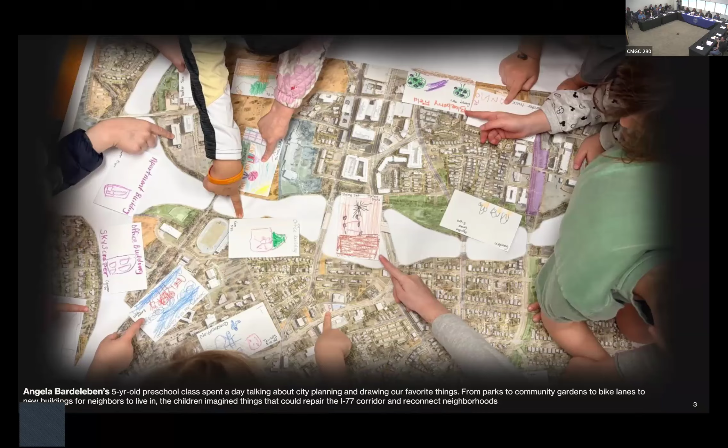First of all, thank you Commissioner Meyer for the invitation to share these exciting designs with you and the rest of the committee and non-committee members for being here to see, hear, and ask questions. I think today is a historic day in our community, not just because my daughter Edie turns 10 today, but because I feel we are embarking on a long overdue journey to repair and reconnect what those before us have broken and disconnected. I'm excited about that opportunity, and I hope by the end of this presentation you share our excitement.

Over the past several months, something remarkable has happened in Charlotte. A community-wide conversation about healing, reconnection, and the kind of city we want to become was the result of a conversation that began as just concerns about another highway widening project.

When we at Sustain Charlotte launched the Reimagining 77 challenge, we honestly didn't know what to expect. We didn't know if anybody would participate since we weren't paying anyone — we were just asking people to volunteer their time and talents. But the response was extraordinary. We received ideas from professional urban designers, architects, planners, engineers, students, and neighborhood advocates, even a submission from someone in Wisconsin who's never been to Charlotte, and children as young as 5 years old submitted their ideas.

Despite the differences in age, background, and technical expertise, there was a striking common theme running through nearly every submission: people are hungry for a future that reconnects communities rather than further divides them. Again and again, people imagined parks instead of pavement, public spaces instead of barriers, greenways, safe walking and biking connections, gathering spaces, and places where children and families can thrive — not because they oppose reducing congestion, but because they want transportation investments that improve quality of life and strengthen neighborhoods instead of weakening them.

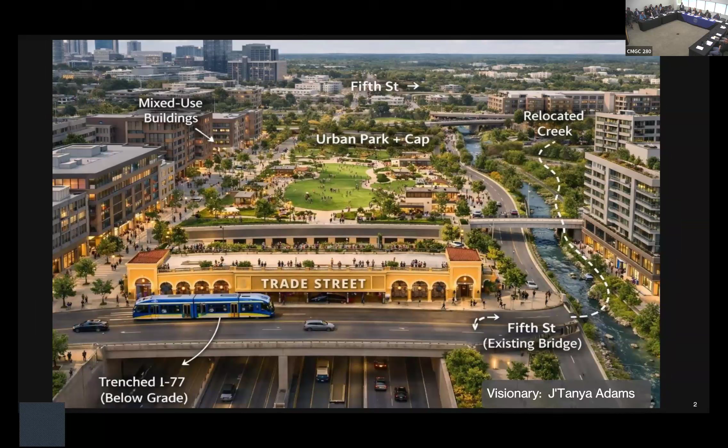I'm going to go through these quickly because of time, and I want to save time for the more in-depth ones. This first one popped up online — it was by longtime West Charlotte leader J'Tanya Adams. AI was used, but she's not a professional; she just typed in what she wanted to see, and it's pretty amazing.

There's a lot going on here — new mixed-use development along 77, with 77 running under the green space. Irwin Creek has been daylighted, as we say, opened up, which is currently mostly buried under 77. Lots of exciting things here. Next slide.

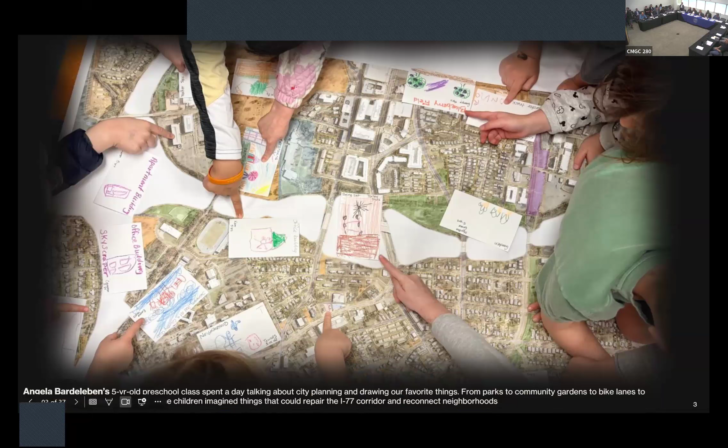This is a 5-year-old preschool class learning about urban planning and sharing what they'd like to see in place of 77. They drew their favorite things: parks, community gardens, bike lanes, and even blueberry fields. They had lots of great ideas — future urban planners, hopefully, in there.

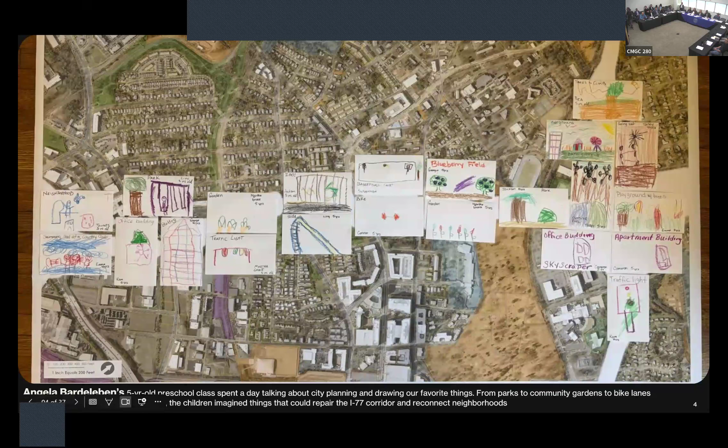Go ahead — another shot of their amazing artwork. I see a slide, even an office building, and there's the blueberry field, you probably can't see all of that, and a traffic light, of course. Go ahead.

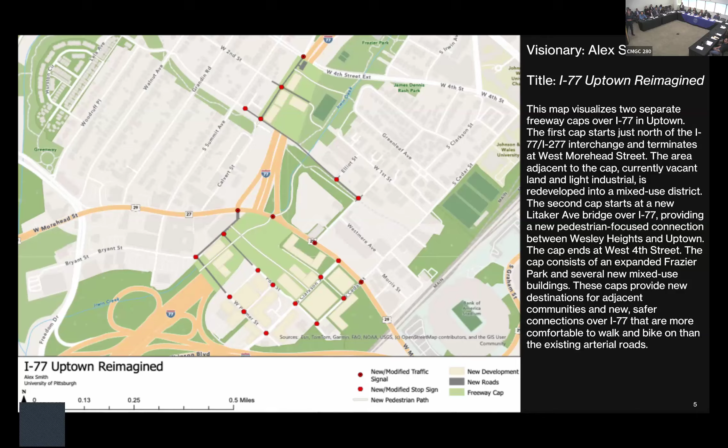Visionary here, his name is Phil Beasley. He called his design Reconnect the Urban Fabric. He envisions capping and burying 77 adjacent to Uptown, removing a segment of 277 to connect Uptown with South End, simplifying the network, reconnecting the grid, adding infill and park space.

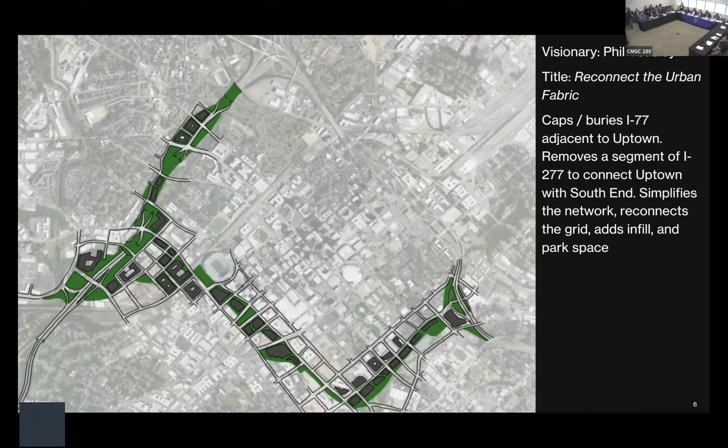Melissa Harmon, who I believe is a student at UNC Charlotte—we had several UNC Charlotte students submit—also proposed two freeway caps, and you should know none of them were talking to each other. But we saw a lot of similarities; almost everyone suggested a cap. Her vision was two caps over the corridor, an effort to increase walkability, connect residents to nature, uphold equitable solutions for the environment and neighborhoods, and so on. Both of hers would reconnect Wilmore to Revolution Park and Westover Hills on the west side of 77.

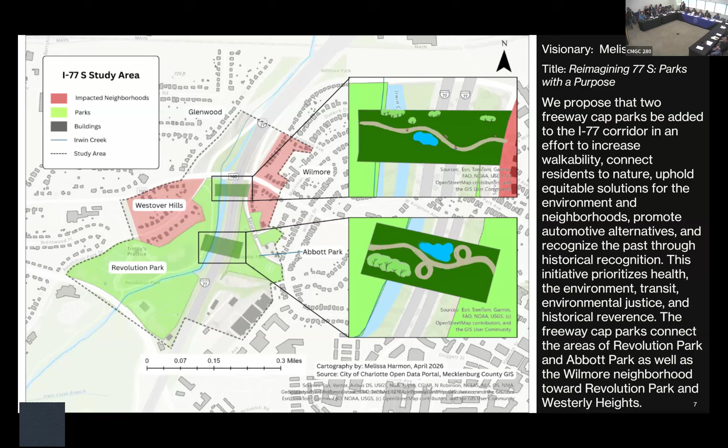And we'll share all these slides, so if you want to dig in more, you can.

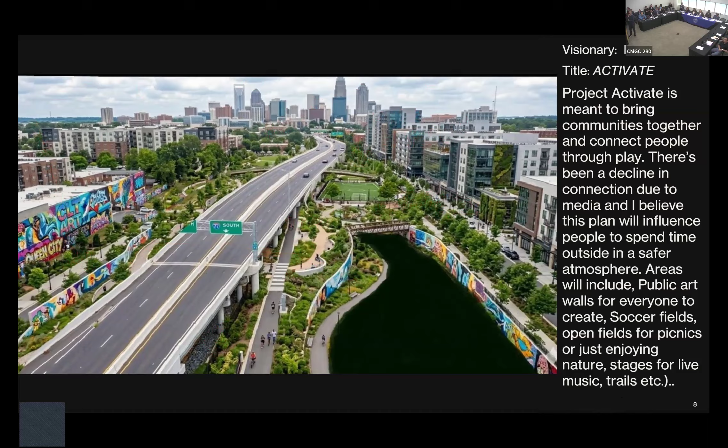Again, most of these are non-professionals. In fact, everything we've seen so far is by a non-professional. Here's another one—another student, I think at UNC Charlotte, Leilani Jones. Her project was meant to bring communities together and connect people through play. There's been a decline in connection, and I believe this plan will influence people to spend time outside in a safer atmosphere—areas with public art, walls for everyone to create, soccer fields, open fields for picnics, just enjoying nature, etc.

This is a sketch—there's a series of sketches—from a non-professional named Oliver Buccino. This is the guy who lives in Wisconsin and has never been to North Carolina. He designed what he called Queen City Plaza. Probably because he doesn't live here, he looked at reconnecting South End to Uptown by capping 277. He said this plan seeks to create what is desperately needed in the area: a new destination in the form of a pedestrian plaza with a variety of colorful architecture, all oriented towards the new space. This reconnects downtown and South End, which is currently afflicted by the dead zone of the highway, unusable green space, and off-ramps. Removing the existing freeway or capping it to form a park is not good enough—there has to be an actual plan to build a district with vitality.

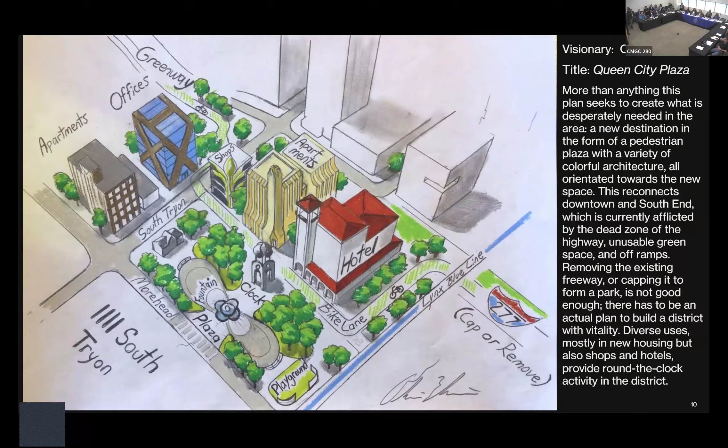Diverse uses, mostly new housing, but also shops and hotels, provide round-the-clock activity in the district. He's one of the few that actually hand-drew his sketches. He's got another one here.

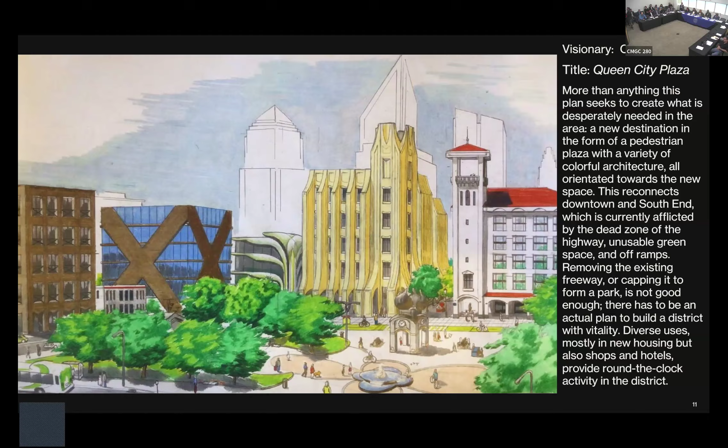Pretty cool examples of architecture. Just imagine if that is where 277 is today, between Uptown—you can see Uptown in the background. Another view, so pretty cool. Got a cat bus in there.

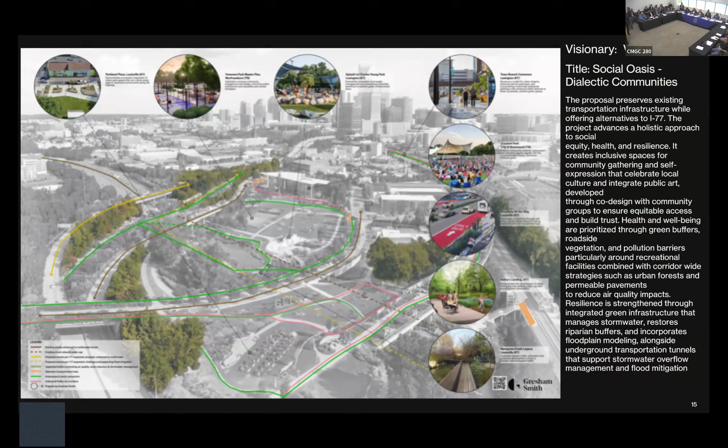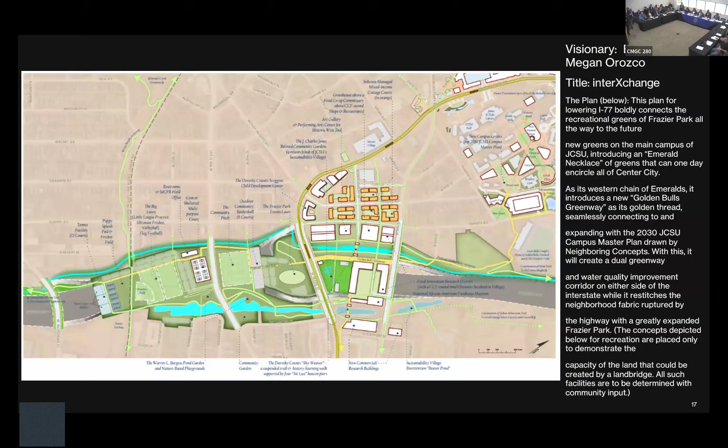Next, you can skip this one. We're going to come back to this one. You can skip a few slides, go ahead. I meant to delete these. This version didn't get deleted, keep going. We're gonna come back to these, I promise. Keep going, keep going. I think this is the last one.

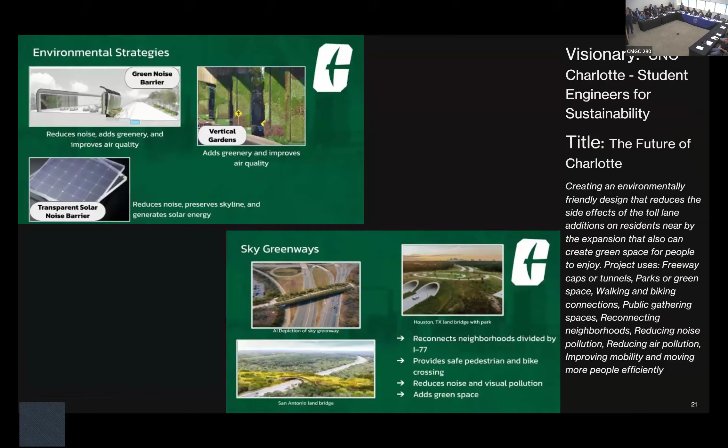Okay, here we had the UNC Charlotte Student Engineers for Sustainability. I didn't even know that group existed until this challenge. I don't know if you do or did. So they took an engineering approach, but they came up with lots of different ideas. They had the caps that everyone else seemed to want to do as well, but also noise control strategies using green noise barriers, rubberized asphalt, earthen berms. They also envisioned what they called sky greenways, reconnecting neighborhoods divided by I-77, reducing noise and visual pollution, adding green space, vertical gardens on some of the existing sound walls, and transparent solar noise barriers. Lots of interesting creative ideas from our local engineering students focused on sustainability at UNC Charlotte.

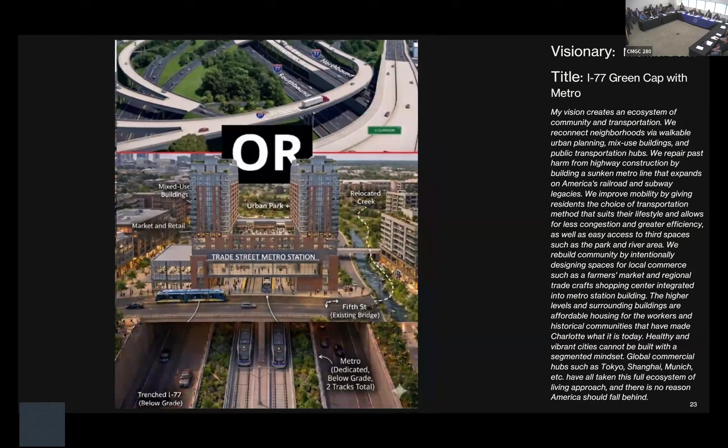In the name of time, I'm going to skip over this one. It's pretty similar to what we saw before with Jatania's, but I will say what they had there was commuter rail. Maybe go back for just a second. So in here, you see 77 is under the cap, but also down the center, they have commuter rail, and they envisioned 77 becoming a commuter rail corridor, not just a corridor for moving people in cars and trucks.

Okay, next one. So did this individual, they also envisioned light rail in the 77 corridor. Keep it moving here.

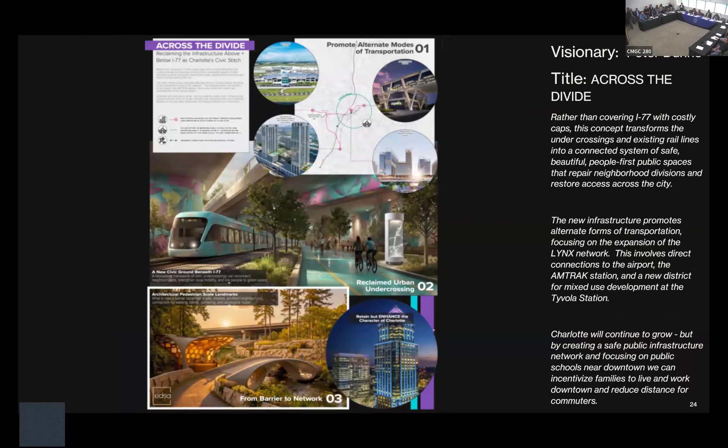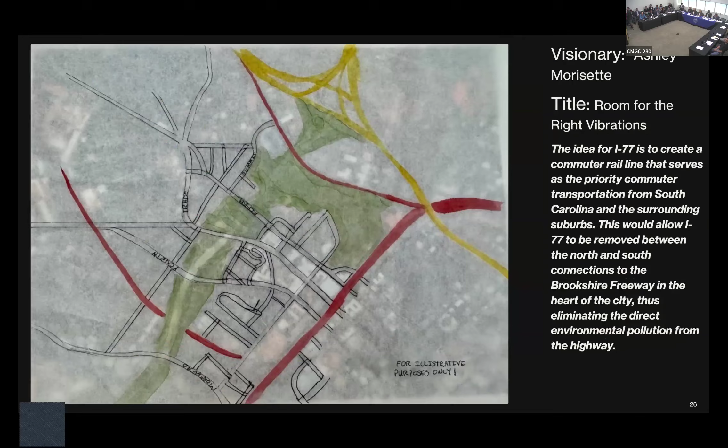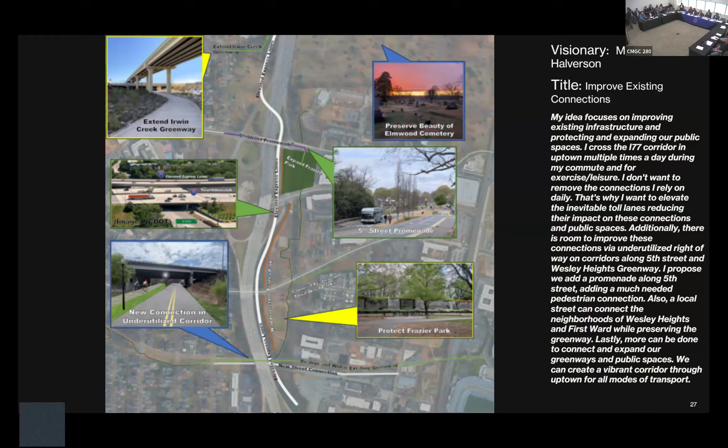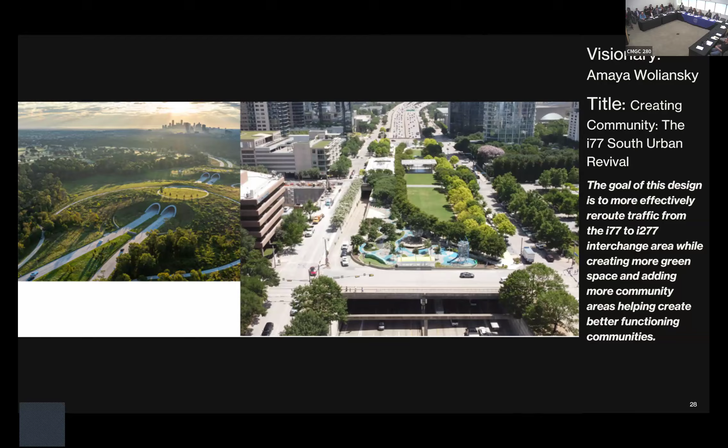I'm going to skip ahead a little bit so that the rest of the presenters have time. Just give you a quick glance at these.

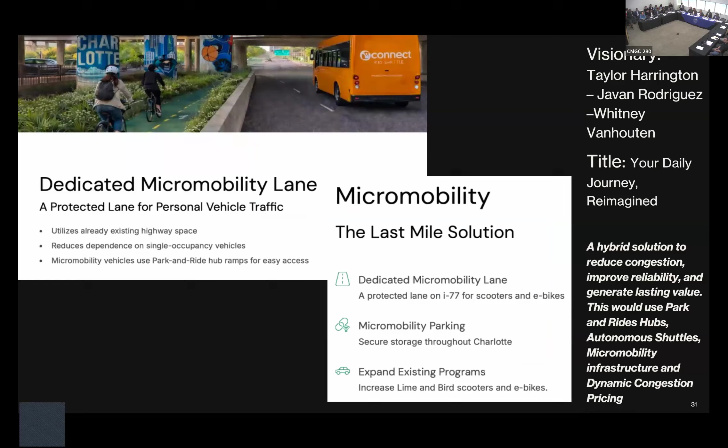Very quickly, this team came up with lots of new ideas. They talked about having autonomous shuttles, like you see there in the image, that's a UNC Charlotte autonomous campus shuttle. They talked about having those in the 77 corridor. A dedicated micromobility lane, so a lane on 77 separated, of course, with hopefully a very sturdy cement barrier for micromobility, that's bikes and scooters.

They talked about dynamic congestion pricing—charging people who drive into the city a higher fee at certain times of day to reduce congestion. This is being used in some other cities, including New York, and they've calculated how much money this would generate. Some of that could come to the county too, so this could be a money generator for the city while also reducing congestion.

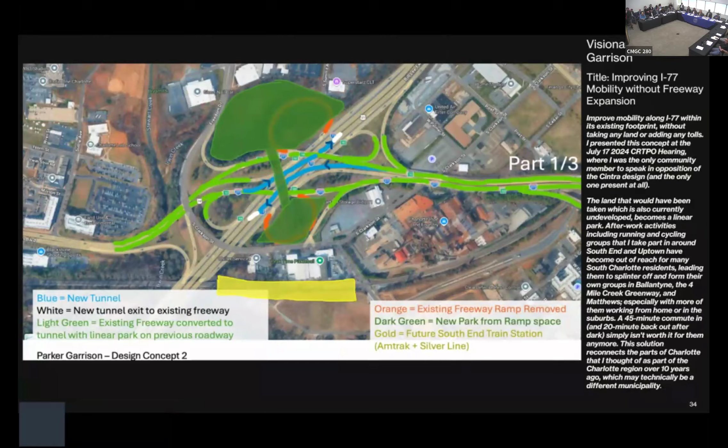We'll keep going. This is a 3-part design by Parker Garrison. Again, I was just amazed. I think Parker Garrison is a computer scientist, but does urban planning on the side.

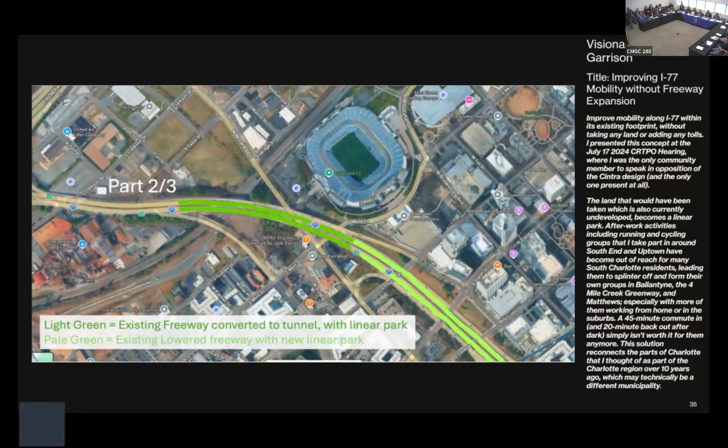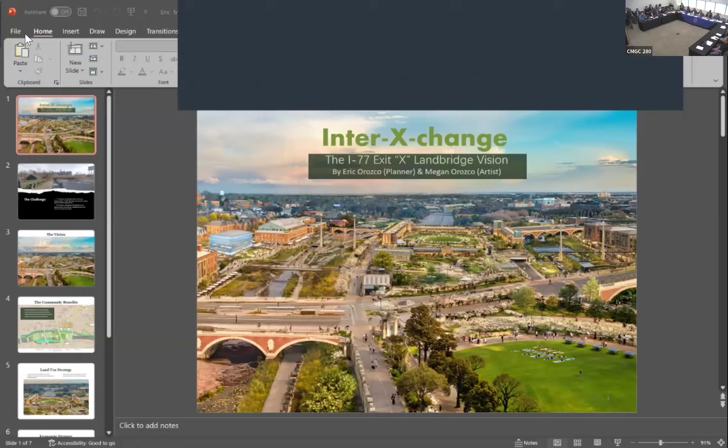This might be our last one for now. Let's jump to the next slide deck. I'm going to present next the vision of a local designer here in Charlotte named Eric Orozco. Eric and his wife Megan Orozco teamed up on this. He couldn't be here today, so he put together these slides and asked me to present them for him. The name of his design is Interchange—Inter-X-change—and he's looking at the intersection of 77 and the Belk.

So that's a big picture view of it. You can't really see from this angle, but 77 is under that green space—you can see it at the top of the image going under. This is a series of caps between Trade Street and 5th Street. And of course you can see the creek—he's actually relocated Irwin Creek in his design, which would happen with the 77 toll lanes. He has a lot of really interesting ideas about why that's important from a floodplain and ecosystem restoration standpoint.

So he talked about the design challenge—designers always talk about the challenge they're trying to address. The challenge here is that I-77 divides the historic West End and other West Charlotte neighborhoods from uptown like a wall, limiting connectivity, safety, and economic opportunity. This project reimagines this barrier as an opportunity to reconnect neighborhoods and restore community fabric.

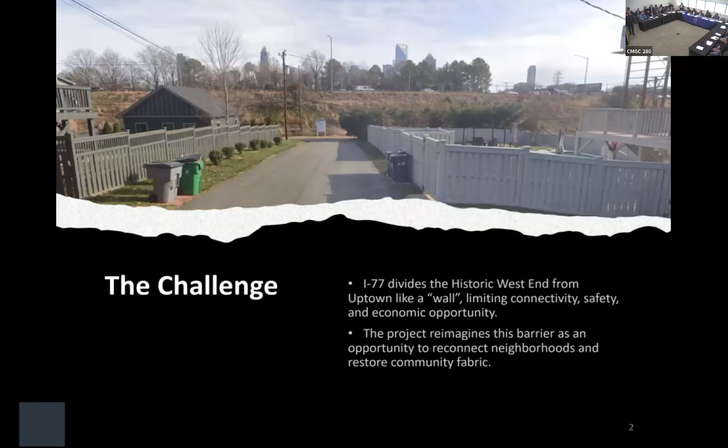Again, I won't read them all off, but he's named different buildings like the J. Charles Jones Beloved Community Garden, a research hub of JCSU Sustainability Village. He's someone who deeply understands the history of West End and the neighborhoods adjacent to 77, and his vision is to bring those stories and those people alive and honor them through the development that would be made possible if we capped 77 here.

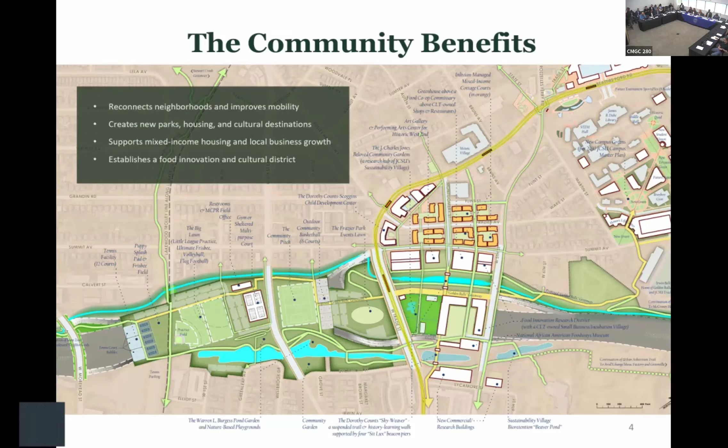And then center the uses and programs inspired directly by the lives of local luminaries, as I mentioned a moment ago—a National African American Foodways Museum, an urban farmers market pavilion, an urban agricultural teaching garden. Lots of opportunities.

I think the big takeaway here is we have an enormous amount of land on the edge of Uptown that is not being used currently. And I'm not talking about the land that 77 sits on, I'm talking about the amount of land that is completely wasted because of entrance and exit ramps, more than we need in that area. And they encircle, you know what the ramps look like, they're huge circles, and all the land in the middle is completely unused.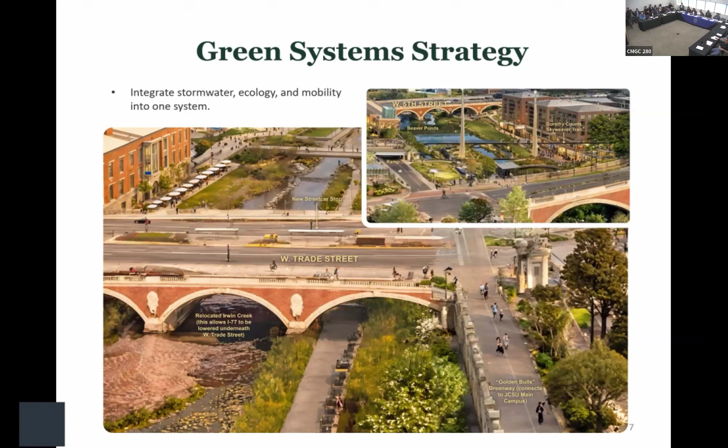Go ahead. And that's it.

Now, I'm excited to turn it over to the team at Gresham Smith, one of our best local design, architecture, and engineering firms. And I'm honored to pass the mic to Vama Joshi, who is an architect and was the lead designer for Gresham Smith's submission, and also a very generous and dedicated Sustain Charlotte board member.

Thank you. And I just want to make sure you know that it's 2:07, and we have a hard stop at 2:30. Yes, so absolutely keep going. Is it on? This is on, right?

Okay, perfect. Thank you everyone for your time in reviewing our vision for I-77 expansion.

Okay, perfect. I can start and then you can move to the next one. I think first slide kind of shows where we are today at the interchange.

Yes, perfect. So we know Charlotte is growing fast, right? And with growth comes opportunities, but also challenges. The interchange that you see there at the Wilkinson Boulevard and John Belk Freeway is the perfect example of how transportation infrastructure shapes the cities we live in. While it is designed to efficiently move traffic, it also determines if it divides or connects the neighborhoods. Today, we are exploring how we might rethink this interchange to better serve all Charlotte residents, not just the drivers passing by.

Okay, so if you go to slide 5, and then once you're there—so this is our proposal. Our vision basically reimagines the I-77 corridor as a multifunctional civic and ecological asset, preserving existing transportation infrastructure while introducing alternatives to NCDOT's proposed expansion. We are utilizing the transportation infrastructure as a connector rather than a divider, relinking neighborhoods, improving environmental performance, and creating public spaces.

You may have to just pause there. If you can go back to slide 5, that would be great. Slide 6, please.

Yes, so here we are highlighting some of the upcoming projects around that interchange. Considering all those high density mixed use projects, the need for public open space at this intersection we think is essential. Next slide, please.

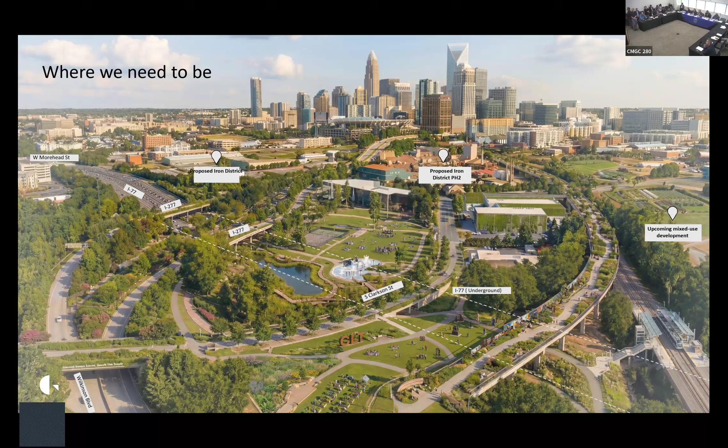So our vision focuses on repairing and reconnecting Charlotte. As shown here, the I-77 interchange is about 35 acres of land, approximately 2.5 Bank of America stadiums. It is a significant amount of land at a prime location, which currently is only functioning as transportation infrastructure. It could very well be a community asset.

At the same time, Charlotte's park score is 37.5 out of 100, and 39% of residents live within a 10 minute walk from a park. Spaces like this interchange present perfect opportunities to improve access to green spaces for the nearby neighborhoods. There's numerous research that shows how access to urban green spaces improves physical and mental health. There's also a strong economic argument that shows investing in public spaces boosts local economies.

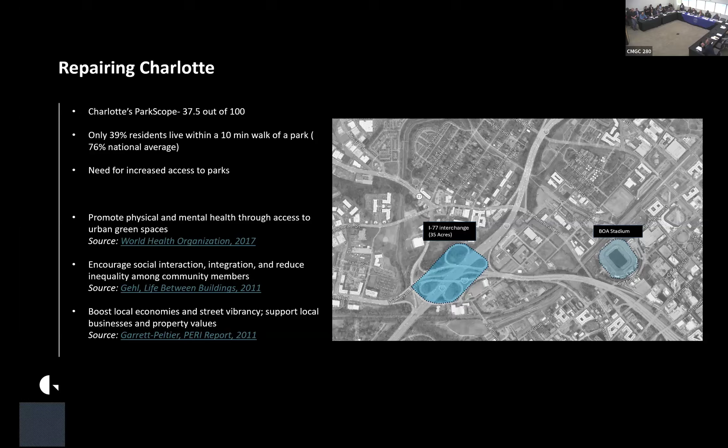So we took inspiration from projects like Clyde Warren Park in Dallas, the Big Dig in Boston, and Freeway Park in Seattle, and felt comfortable proposing a vision that includes a combination of taking a portion of I-77 underground and capping a portion of it. We also took inspiration from local public art, natural landmarks, and existing infrastructure to make this vision relevant to Charlotte.

So here are some key design features we would like to highlight. We are prioritizing equity, health, and well-being by ensuring access to public spaces, parks, clean air, and transportation choices for all surrounding neighborhoods. We are achieving environmental resiliency through integrating stormwater and flood mitigation into underground transportation infrastructure.

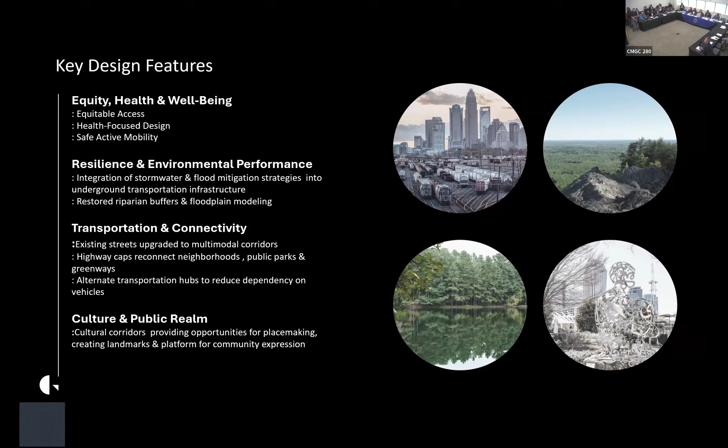We are improving transportation and connectivity by upgrading existing streets to multimodal corridors, combining adding caps and placing a portion of I-77 underground to reconnect neighborhoods, and introducing alternate transportation hubs to reduce dependency on cars. We are prioritizing culture and public realm by creating spaces that support placemaking and provide opportunities for communities to express themselves and gather. And now Fernando here will walk us through how we are implementing these key features at the interchange.

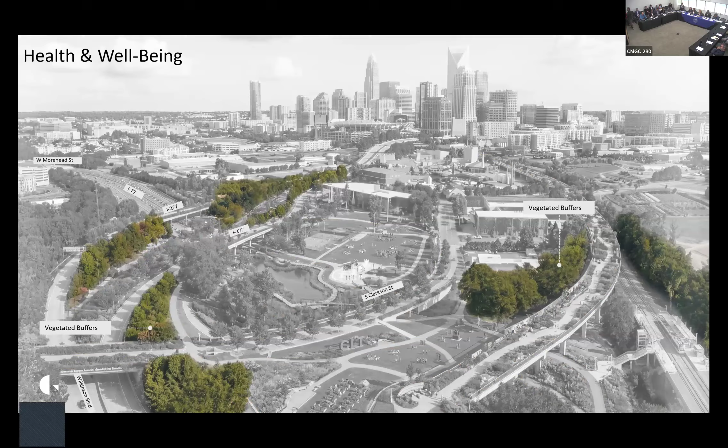Thank you, Vama. To everybody, I'm Fernando Claudio, an innovation technologist here at Gresham Smith. I wanted to take you all through our vision and our proposal and how some of these key features are being highlighted, starting off with health and well-being, where we're getting vegetated buffers that help us mitigate noise and air pollution while increasing biodiversity and helping us regulate temperature as well as stormwater management.

I'll go quickly through some of these, not just environmental but social resiliency, as Vama mentioned, by connecting existing parks and greenways through a series of bike and pedestrian trails, as well as adding underground transportation infrastructure for flood mitigation.

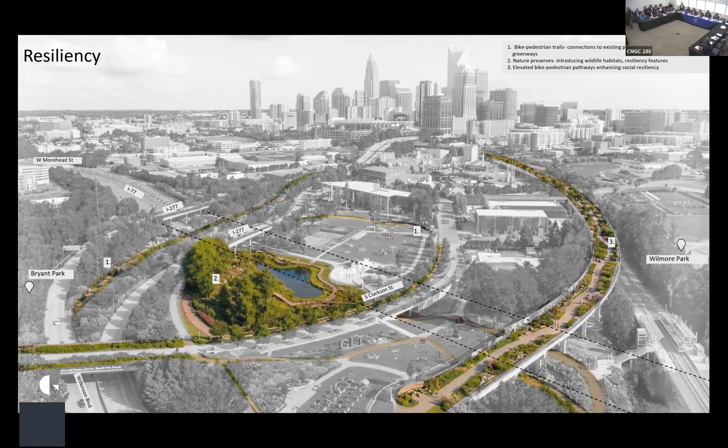One of the many things we talked about was transportation and connectivity, how we're upgrading existing streets to add additional multimodal systems for bike and pedestrian walkways, an elevated pathway that would connect all the way to uptown, which the community nicknamed the Charlotte Skyline, and a light rail connection with the upcoming proposal of the Silver Line, as well as shared mobility corrals for e-bikes and scooters, giving people different ways of getting to these spaces.

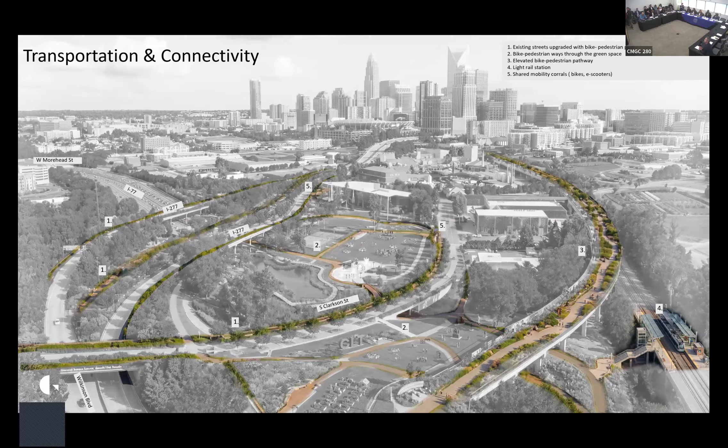Not just providing a green space for the sake of providing a green space, but the creation of cultural corridors where we're providing opportunities for placemaking, creating landmarks and platforms for community expression and gatherings as well.

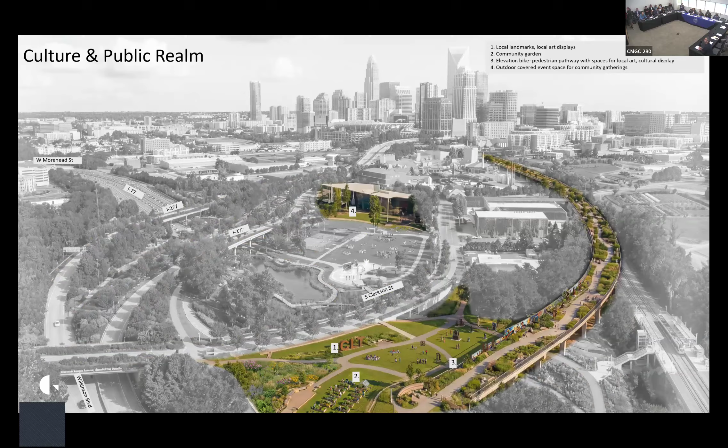As well as thinking about different amenities where people can gather and have different sets of outdoor activities, such as sports like tennis, basketball, volleyball, as well as things for children, like different playgrounds and splash pad areas. So we're thinking about this as a place for all ages to come together as a city.

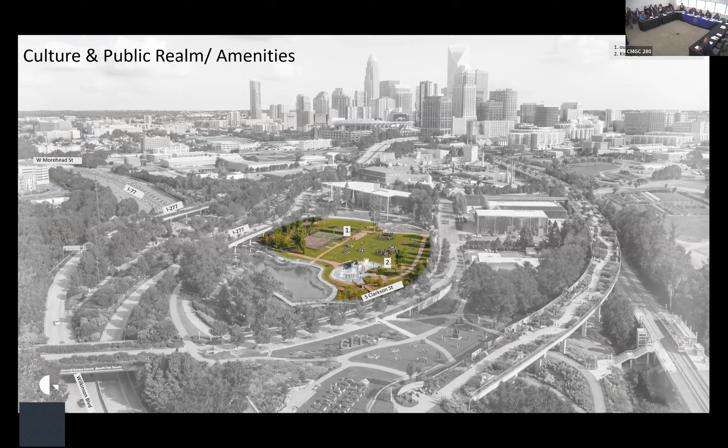Something I want to encourage before we move to the next presentation is that this shared vision we're seeing today is a way Charlotte can start to balance its mobility, equity, and quality of life. We're encouraging collaboration between public agencies, private investors, and community groups, because a project of this scale requires collaboration. All these groups need to come together to provide for Charlotte in a way that's focused on people as much as we prioritize cars.

To wrap up, I want to make sure that Charlotte, at this moment with these types of projects, has the opportunity not only to manage the growth of the city, but at the same time to shape a more connected, inclusive, and vibrant city for generations to come. Thank you.

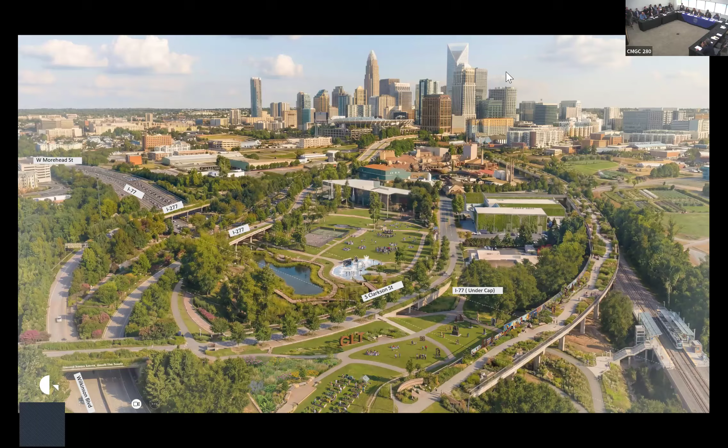Of course. How many more do we have? Just one more. Okay, no, you're fine. I know they want to ask questions and I just want to have time.

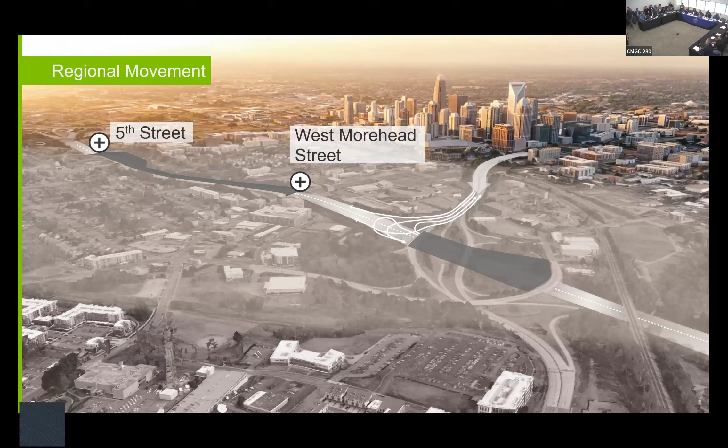So what we look at first is what are the big moves here. The first big move is: what if we took the existing elevated portion of I-77 between 5th Street and West Morehead Street—today it's elevated over existing local streets—what if we lowered that so it goes underneath the streets instead? We also look at the potential for rethinking the space needed for the I-77/277 movements, and if there's a way to compact that into the smallest space feasible. So the idea is to lower I-77 so it crosses beneath instead of above local streets, and compact the I-77/I-277 movements.

Next slide. Within the space that's left over, we would look at trying to do a restoration of Irwin Creek, daylighting it, making it become both an ecological improvement and a social improvement to the area.

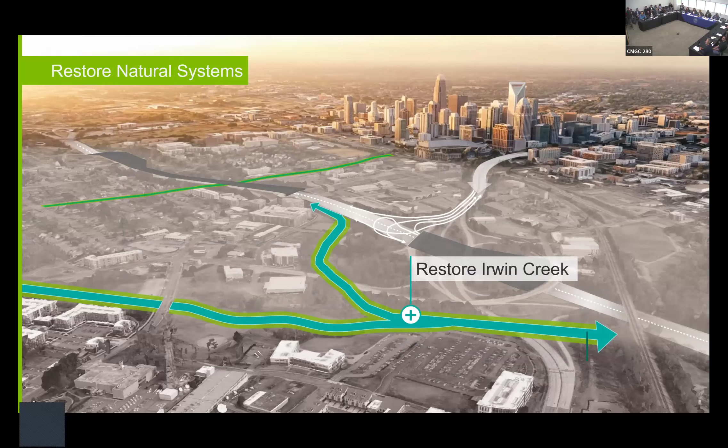Next slide. And within the space that's the Belk interchange today, the question is: is there a better use for that land, or what is the most valuable use of that land? Could it also function, potentially not as the on and off ramps to I-77, but as a densified network of local streets that restitches the urban fabric?

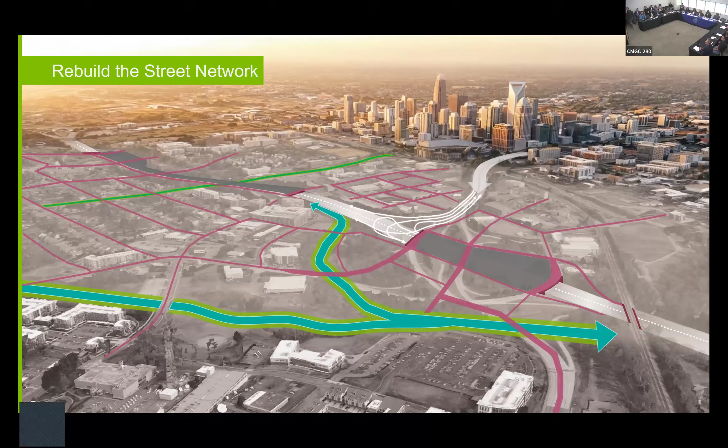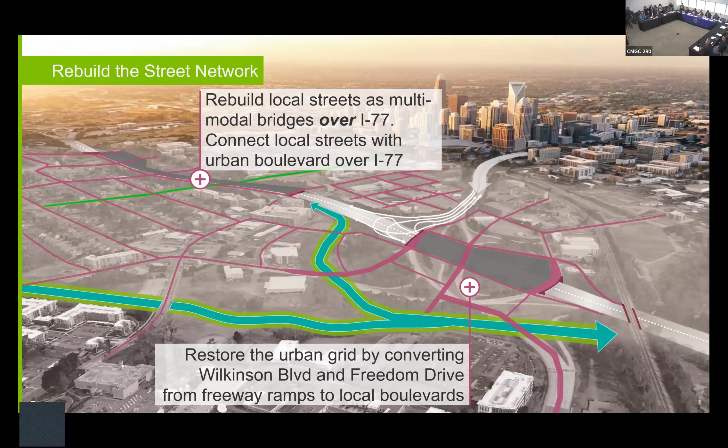Next slide. So the idea here would be to restore the urban grid by converting Wilkinson Boulevard and Freedom Drive from freeway ramps to local boulevards, while still preserving access to I-77 through a frontage road or something else I haven't figured out yet. Then rebuild local streets as multimodal bridges over I-77, connecting those local streets with an urban boulevard over I-77—so instead of being underneath I-77, those local streets would be above it. Next slide.

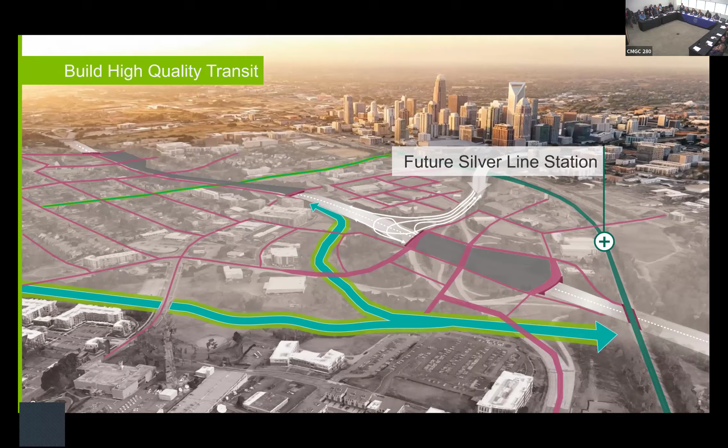So we also are trying to think about transit integration. We know the Silver Line's coming in the future, so the question is how do we maximize the transit-oriented community and transit-oriented development that's possible around our future Silver Line stations?

So we look at some of the areas where we were able to create this urban grid. How can we use that to become new development space? That's space for housing, office, retail, civic uses, and parks. It can be used for many different purposes.

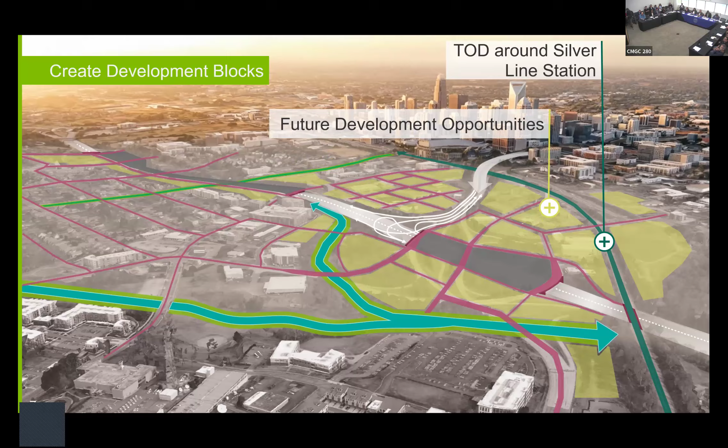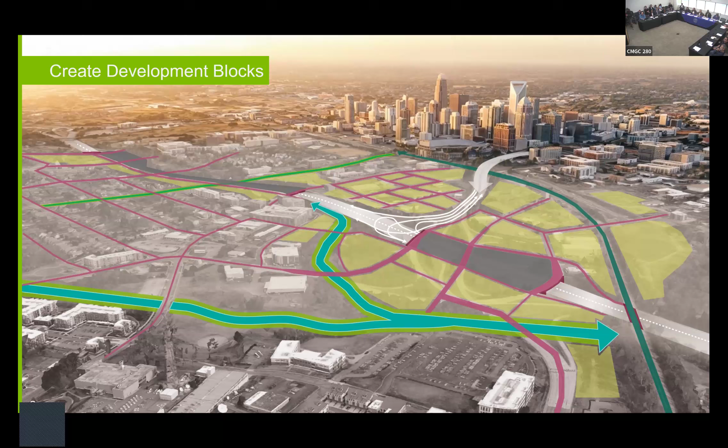In yellow, some of these are developments that are already in the planning process, and some are potential opportunities that could arise if we rethought the use of land in Center City.

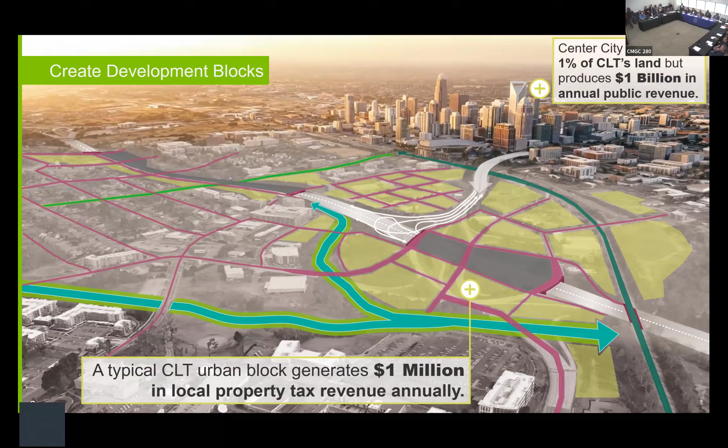As a point of reference, there's a lot of variables that go into this, but a typical urban block can generate over $1 million in local property tax revenue annually. According to Center City Partners data, Center City itself produces $1 billion in annual public revenue each year. So land close to Center City is something that is very important for all of our other government functions.

And then the fun part that I think so many people focused on as part of the RFE process is: what do you do in between the bridges?

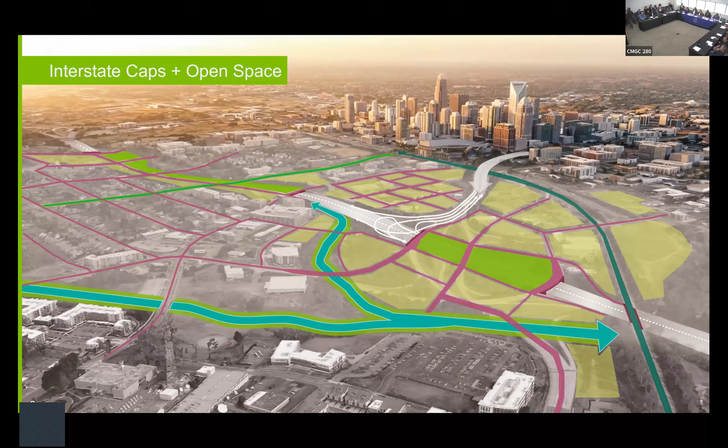This can happen either all at once or incrementally over many years. When you restitch these crossings of I-77 as local streets, in the space between you can start to think about what it would mean to add park caps. That might be an expansion of Frazier Park with an urban frontage, a new street fronting it on one side. For the three bridges that cross I-77 today at the Belk interchange, what would it mean for those to become local streets and cap them with a central park? And what this could look like over time.

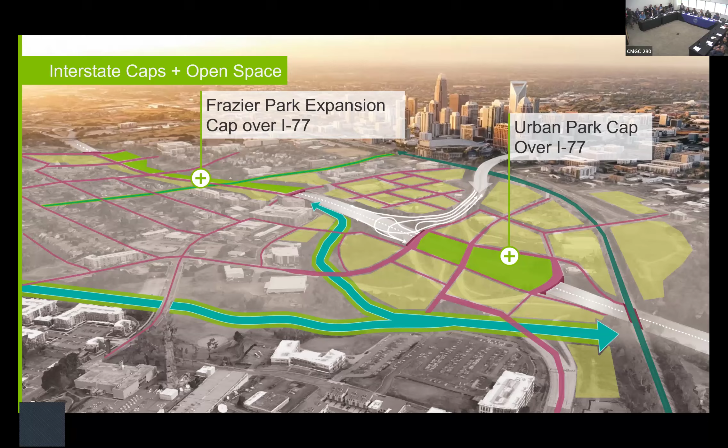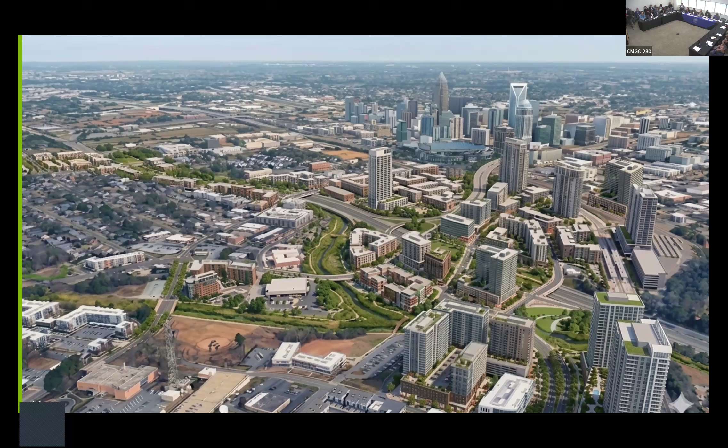There's probably hundreds of different iterations of what a future Charlotte might look like, but we're talking about a 50-year time frame, so it's important to have that long-term future prospect in mind. This is one concept that introduces a blend of new development and park space.

From an implementation standpoint, this is something that would definitely require multiple phases. It would unfold probably over years or possibly decades, not all at once. There has to be a logical progression: there's a vision, there's planning, there's design, there's funding, and then finally there's construction over different iterations.

I know we're running out of time, so I'm going to try to get through this quickly. The question where we're at right now is: how can highway projects evolve into city repairing projects? The best example I thought of, as we think about the dialogue that's happened around I-77, is to take a look at what's happening with I-35 in Austin, Texas right now over the last 7 years.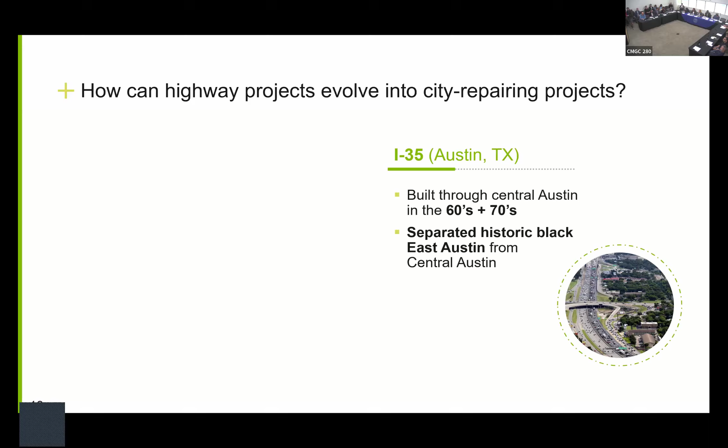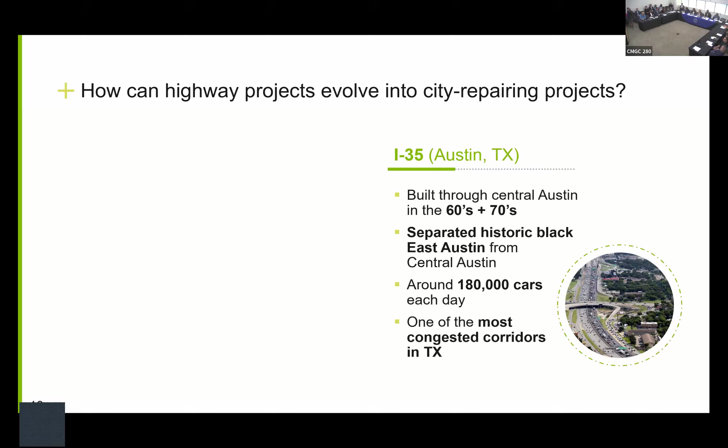I-35 has a lot of similarities to I-77. It was built in the 60s and 70s, separated historic Black East Austin from Central Austin, carries about 180,000 cars a day, and is one of the most congested corridors in Texas. You can click through to see the similarities to I-77.

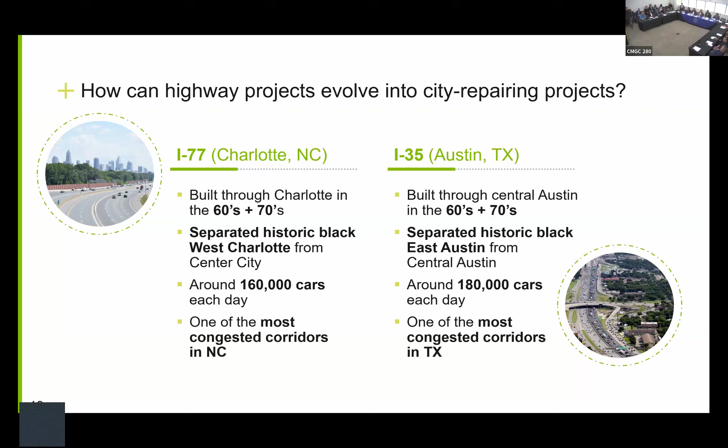So what's happened in Austin over the last 7 years? You can click through these ones pretty quickly too. So this is the Capital Express Project, or the CapEx.

So when I think about where Charlotte is today compared to Austin's timeline, it doesn't have to take 7 years to get there. We have a condensed timeframe here, but I think we're kind of where Austin was between 2019 and 2020. So with that, I can conclude.